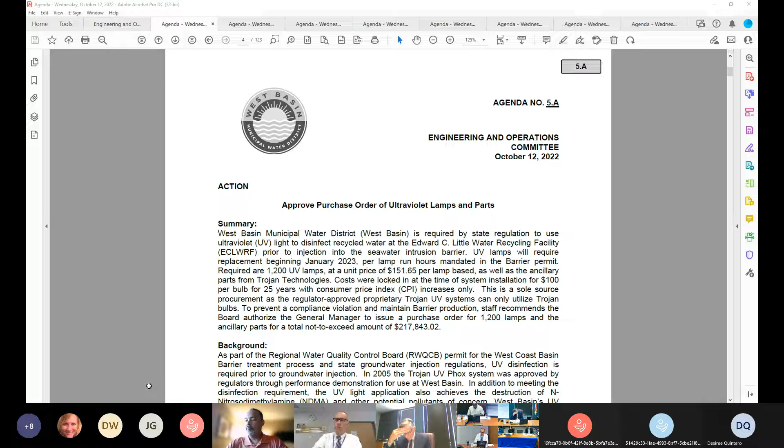Thank you, EJ, and good afternoon, Chairman Alvarez and members of the board. This item has to do with procurement of UV lamps being used at ECL. If you can turn to page 4 of your package, I'll begin with my report. As you're all well aware, West Basin is required by state regulations to use UV ultraviolet lights to disinfect our recycled water for our barrier injection purpose water.

Each of these UV lamps has a certified life of approximately 12,000 hours, which is about 16 and a half months of usage at full capacity. It is required by the West Basin regulatory permit to be replaced within this time frame. These UV lamps were last replaced starting in September of 2020.

Due to the barrier shutdown in 2021 and the extended influent water quality upset, the barrier system was shut down, and staff revised the original replacement date and is forecasting that the lamps will approach that 12,000 hours beginning January 2023.

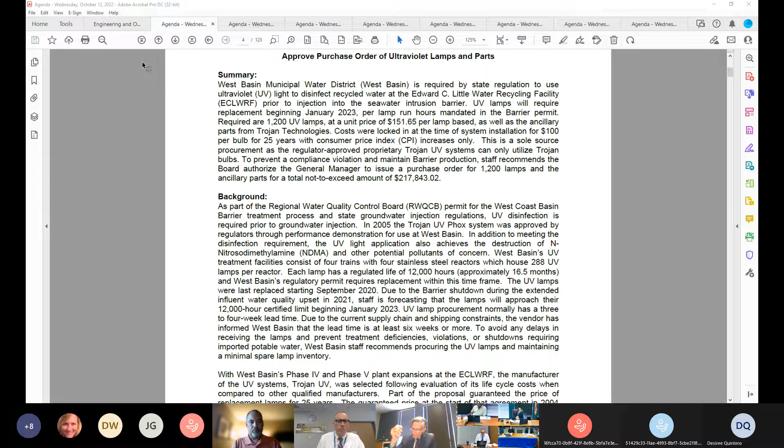UV lamp procurement normally has a 3 to 4 week lead time. Due to the current supply chain and shipping constraints, the vendor has informed West Basin staff that the lead time is now at least 6 weeks out. So to avoid any delays in receiving the lamps and prevent deficiencies and violations, West Basin staff is recommending procuring the UV lamps at this time and maintaining a minimal spare lamp inventory.

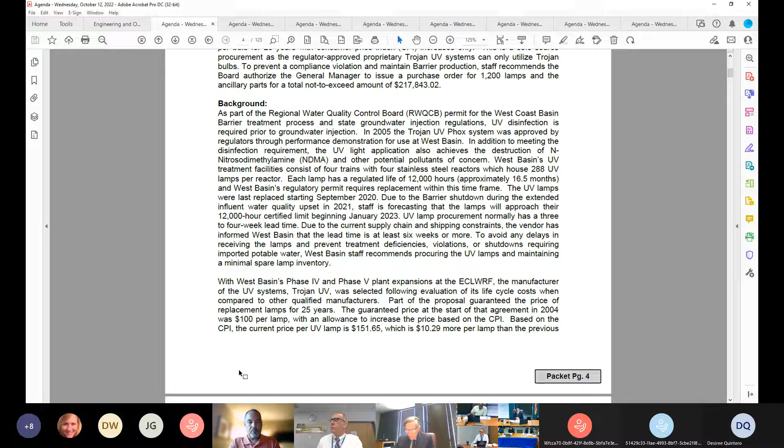As the memo details, the Trojan UV system was selected as the UV system back in 2004, and it is required that we use Trojan lamps for replacement. As part of the original proposal, West Basin was given a guaranteed price of replacement lamps, based with a starting price of $100 per lamp. With the adjustment of CPI, the UV lamps are currently $151.65. In addition to replacement of the 1,200 lamps, West Basin will need to replace some ancillary parts.

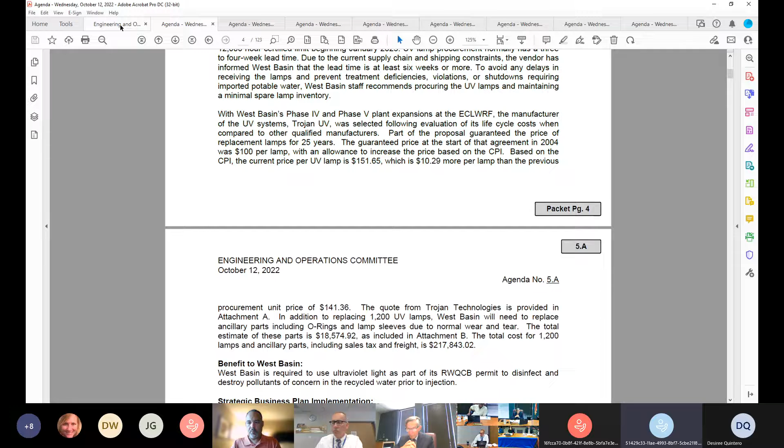This includes O-rings and lamp sleeves due to normal wear and tear and some corrosion that happened due to the extended shutdown time. The total estimate of these parts is $18,574.92, and the 1,200 lamps total $217,843.02 altogether. So with that, I will read the recommendation that the board authorize the general manager to issue the purchase order for 1,200 Trojan UV lamps and ancillary parts from Trojan Technologies for a not-to-exceed total amount of $217,843.02. Okay, thank you. Director Williams, do you have any questions?

It's needed for our barrier production, and we're basically tied to an agreement that we entered into and tied with regulations that we have to purchase these particular lamps. So yes, I concur with the recommendation. Very good. Thank you. I have none.

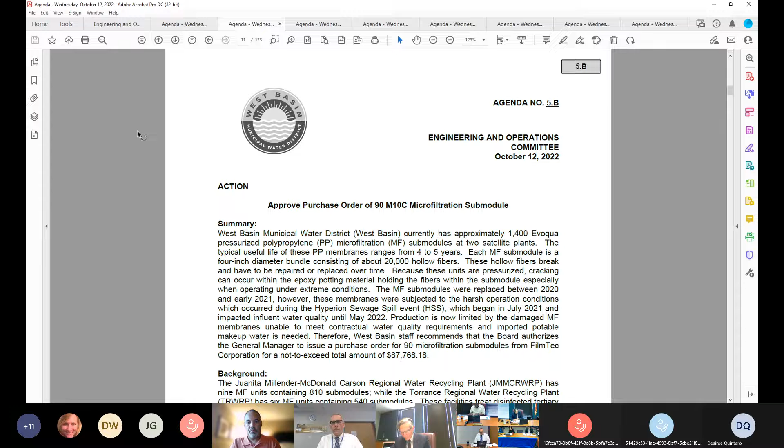Good afternoon again. This item is regarding the purchase of some new pressurized polypropylene MF membranes for our satellites. These are for the older MF systems at our satellites. Between the two satellite plants, JMM and Torrance TRWRP, West Basin utilized about 1,350 of these polypropylene MF membranes, and these are the older systems used to produce the boiler feed water for both Marathon and PBF refinery, respectively.

These older polypropylene MF systems, unlike the newer PVDF MF system at ECL, cannot be subject to the more rigorous cleaning methods and harsher chemicals. So they're prone to fouling easier, and in addition, these hollow fibers are under pressure all the time.

So the cracking within the epoxy potting material holding the fibers together can occur and needs to be replaced. Additionally, these aging MF systems have been operating beyond the original design criteria, as I mentioned previously, and are developing cracks at the manifolds and the center tubes. So these all impact the overall microfiltration water quality.

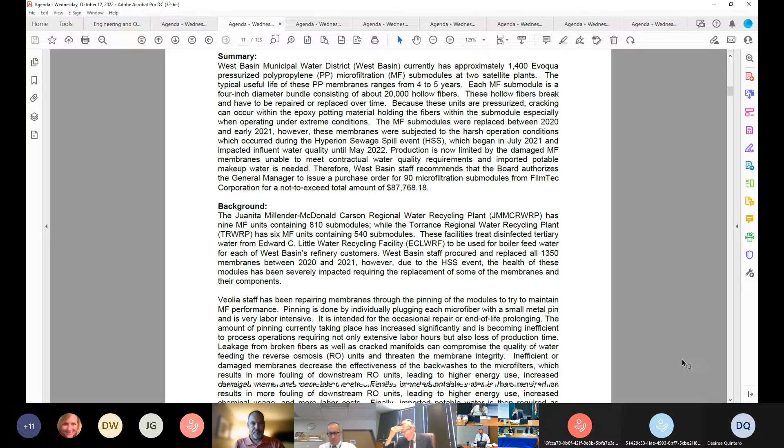Veolia staff have been repairing membranes, or repinning, that's what we call repairing the membranes. These actions are really labor intensive and take a lot of time. Depending on the location of these modules, whether it's outside versus inside modules, it takes a lot more time and sometimes risks making additional damage. So in summary, we've been replacing more than the normal number of modules this past year.

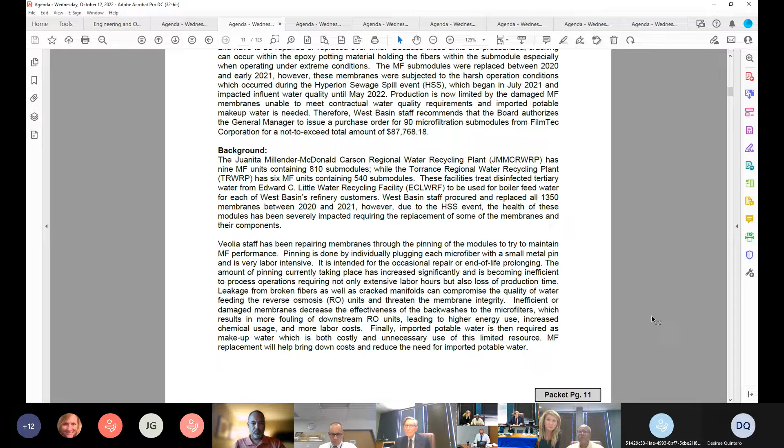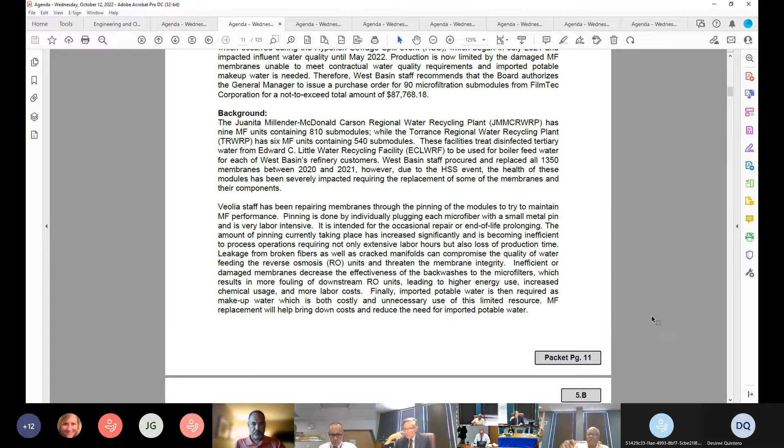Leakage from these broken fibers, as well as these cracked modules, really compromises our water quality that's sent to our customers. It ultimately also affects the RO performance and our membrane life. When our water quality is compromised and results in exceeding our customer requirements, a lot of times we have to supplement with imported potable water, which is used as makeup water to feed the RO system. So at this point, MF replacement will be needed and will help bring down the cost of cleaning and minimize the use of potable water.

Staff is here to request that West Basin purchase about 90 modules to help replace some of the needed membranes that already have many pins done on them.

As mentioned, back in 2020 these older polypropylene Evoqua membranes are of a proprietary nature and can only be replaced with Evoqua/FilmTec membranes. West Basin did have a long-term pricing agreement beginning in 2009, which was renewed in 2017. The negotiated price, with adjusted CPI, currently is $859.73 per module.

For your reference, without the long-term pricing agreement, the current unit price for the M10C module is about $950 per module. There is currently a long lead time for these modules, which are being procured and manufactured in Australia, and we're not able to get these until February 2023. So it's pretty pertinent that we put in the order now so we can get them by February.

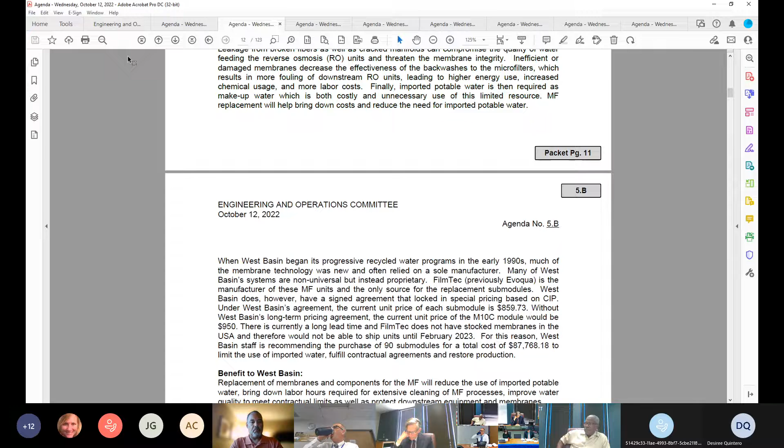In the meantime, staff will have to continue to pin and repair the current modules. Anyway, with that I will read the recommendation: that the board authorizes the general manager to issue a purchase order for 90 microfiltration submodules from FilmTec Corporation for a not to exceed total amount of $87,768.18, including shipping and sales tax.

With that, I can answer any questions. All right, we'll see if we have any questions. Director Williams? No, thank you. Director Williams doesn't have any. How about the other board members? None, no, thank you. Okay, so I have kind of a similar question: what is the typical rate of replacement for these?

Yes, I have some data for you. Back in 2020, when they were almost to the end of their life, our average pinning was probably 1 or 2, and that was at the end of 5 years. Last year, at the height of the Hyperion upset, we were averaging about 5 to 10. And this year, we're seeing like 17 or 20, up to 20. And in terms of replacement, I asked for replacement.

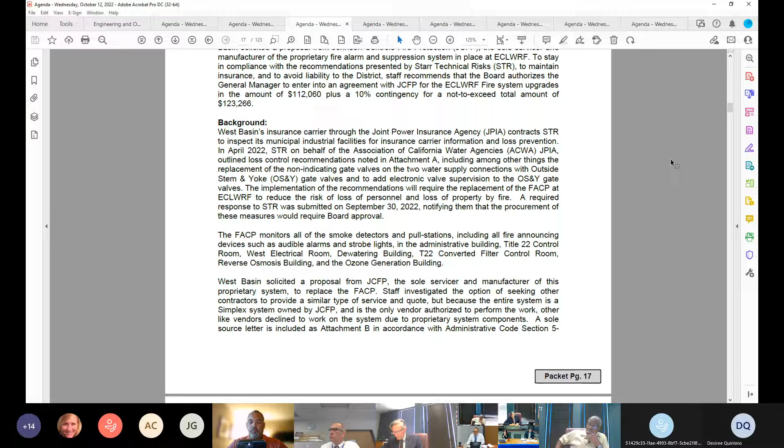West Basin solicited a proposal from Johnson Controls Fire Protection, the sole servicer and manufacturer of this proprietary system, to replace the FACP. Staff investigated the option of seeking other contractors to provide a similar service, but because the entire system is a simplex system owned by JCFP, and they are the only vendor authorized to perform this kind of work, other vendors declined to work on the system due to the proprietary nature of these components.

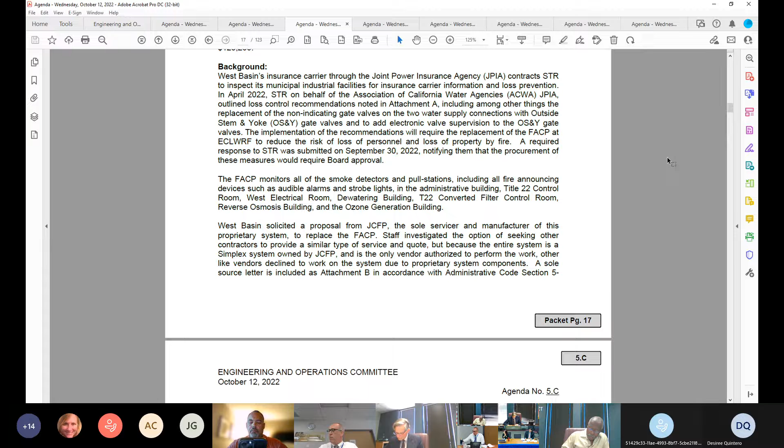A sole source letter is included for your reference in your package starting at page 25 as attachment B. Staff also looked into the alternative of replacing the entire fire suppression and monitoring system extending throughout the facility with a non-proprietary system, but it would take an extended period of time, multiple months, with cost predicted to be more than $1 million.

JCFP submitted two cost proposals, included as attachments C and D on pages 26 and 38 of your packet respectively, to West Basin for the panel replacement and valve supervision implementation, in the total amount of $112,000 and $112,060.

In order to stay in compliance with the recommendations presented by STR and to avoid district liability through threats to life or property, staff recommends that the board authorize the general manager to enter into an agreement with Johnson Controls Fire Protection for the Edward C. Little Water Recycling Facility fire alarm control panel replacement and addition of electronic backflow valve supervision, in the amount of $112,060 plus a 10% contingency, for a not-to-exceed total amount of $123,266. I'd be happy to answer any questions.

Thank you. Director Williams - no, thank you. Any of the other directors or board members have any questions? No, thank you. No, thank you. I don't have any questions. So with your concurrence, Director Williams, we'll move this item forward also. Absolutely. Okay.

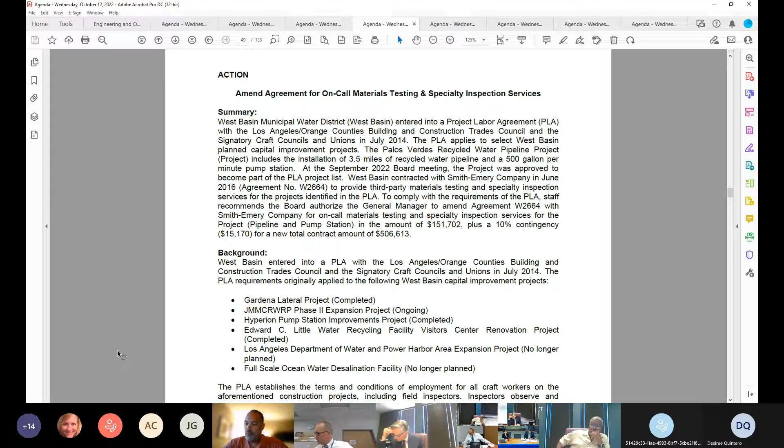To amend agreement with our existing on-call material testing and specialty inspection services company. As you might recall, at the September board meeting, the Palos Verdes Recycled Water Pipeline Project, including pipeline and pump station, was approved to follow the project labor agreement requirements that West Basin currently has with the Los Angeles Orange County's Buildings and Construction Trades Council and the signatory craft councils and unions. This PLA was signed in July 2014.

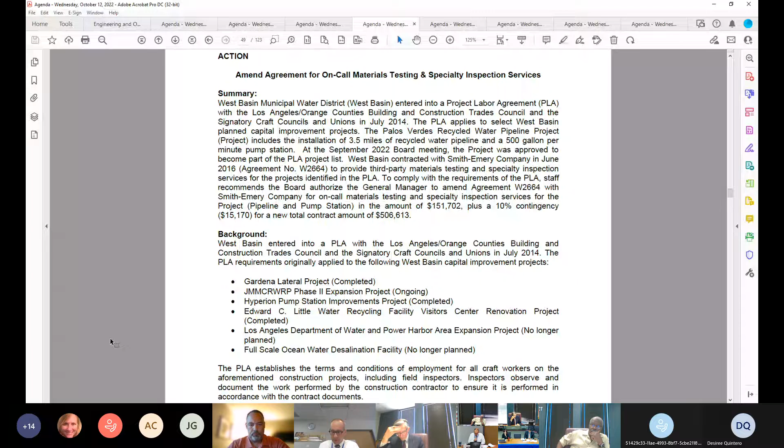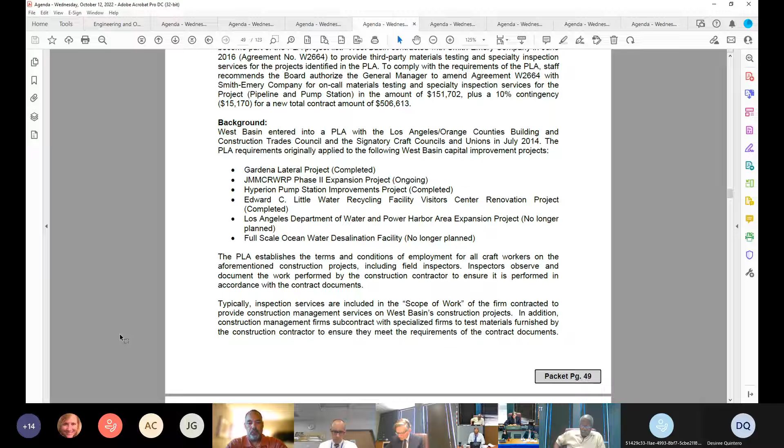And in order to comply with the requirements of the PLA, in 2016 West Basin entered into an agreement with Smith Emery to be able to meet the requirements that the PLA requires for specific characteristics regarding the crafts. So typically construction management includes material testing and specialty inspections, but because construction management tends to be professional service, they don't fall into the PLA. So for the same reason, with having a third-party contract with a specialty construction material testing firm, West Basin is able to meet those requirements on the PLA.

The PLA, it's important to notice, limits the number of inspectors that can be employed, and also requires fringe benefits to be paid directly to the union throughout the duration of the work. So that's something that construction management teams typically cannot do or meet.

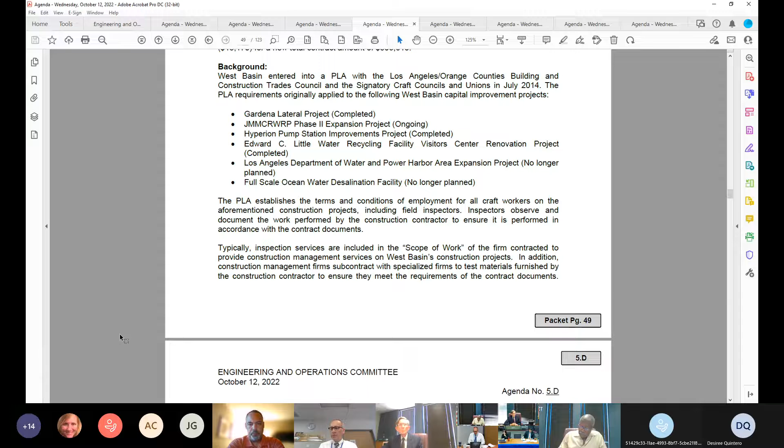So for the same reason, with the Palos Verdes Recycled Water Pipeline Project becoming a new project to follow PLA, staff is recommending to amend the contract that we currently have with Smith Emery to perform these services. Smith Emery has already completed 3 projects, one being a pipeline and the other being more like a facility structure type of work. And currently they're working on the Juanita Millender-McDonald Phase 2 expansion project.

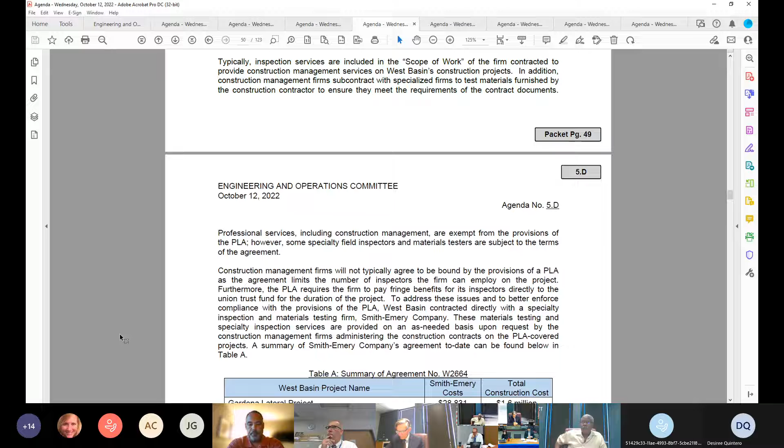West Basin requested a quote to do this particular work on the Palos Verdes project. Again, this is pipeline and pump station. And their quote became $151,702. Sorry, can you see well?

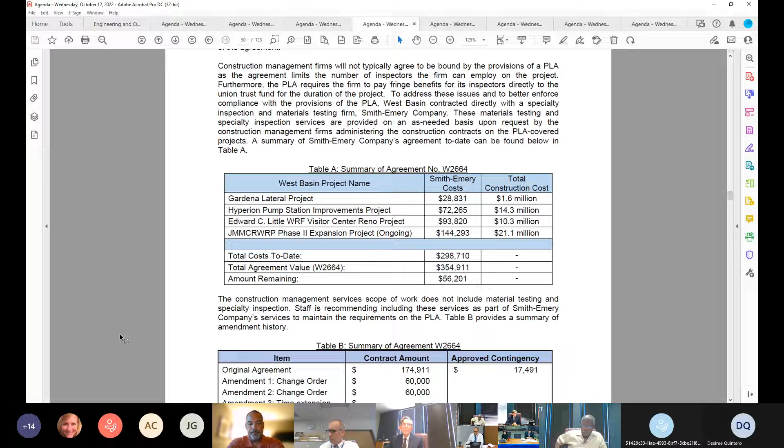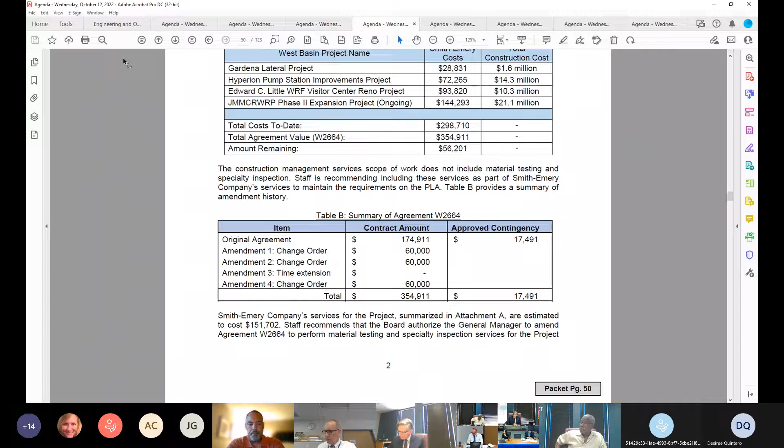So with this, I will read the recommendation. Please note that as part of the attachment, the quote has been included on this board item. The recommendation reads that the board authorizes the general manager to amend agreement W2664 with the Smith Emery Company to provide on-call material testing and specialty inspection services for the Palos Verdes Recycled Water Pipeline Project, which is pipeline and pump station, in the amount of $151,702, plus also a 10% contingency, which consists of $15,170, for a new total contract amount of $506,613. With this, I'll be happy to answer any questions.

Okay, thank you very much. Director Williams, do you have any questions? None here, I don't see anything out of the ordinary.

Any of the board members have any questions? No, thank you. And Director Deere, if I could point out that we did mute you on our end. So if you'd like to unmute yourself, you'll have to hit star 6. Okay, sounds like you're off mute. So if you have anything to add, please go ahead. Apparently not.

Okay, so I have just a question or two. We're doing two actions here, basically amending the PLA to include Smith Emery. No, it's only one action item, which is a change order approval for Smith Emery for an additional $151,702 plus a 10%. It's just, that's the only action.

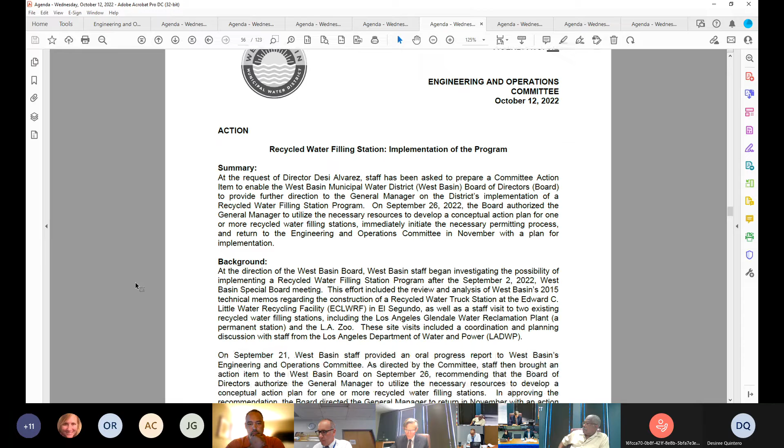Happy to do that. This item is on your agenda as item 5E, the recycled water filling station. It begins on packet page 56, and I'll be handling this presentation. We do have an assortment of staff and our leadership, our general manager, available for any questions you might have.

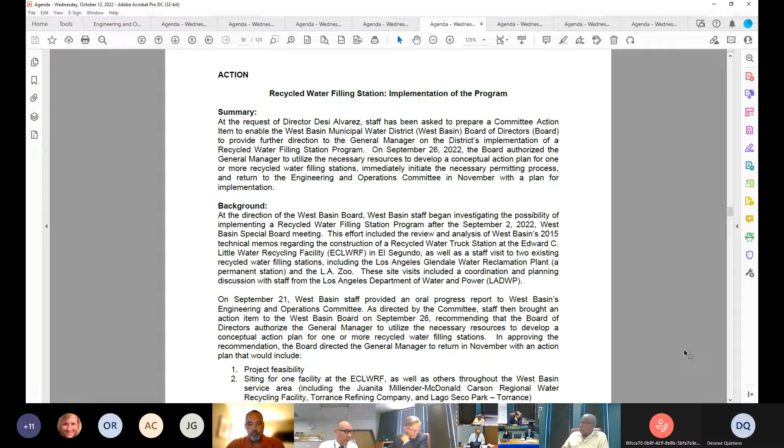In September, West Basin staff brought back an oral progress report at West Basin's Engineering Operations Committee on findings from pursuing a recycled water filling station. At the request of the committee, we brought that back on September 26th with a board memorandum action item, seeking feedback and also contemplating a specific action plan to bring back in November.

Staff has been meeting, we created an internal working group, and have held two meetings accordingly, plus a third one today, working towards the future. You can see what was summarized in that board memo on September 26th.

At the direction of our chairman, Director Alvarez, he asked for staff to bring this back as an additional action item for this committee, for additional input from the committee and board to the general manager regarding implementation of the recycled water filling station. With that, I'll throw it over to our chairman for additional feedback.

Okay, you had some exhibits and so on in the material you sent out. Do you want to go over those, or is that something for later?

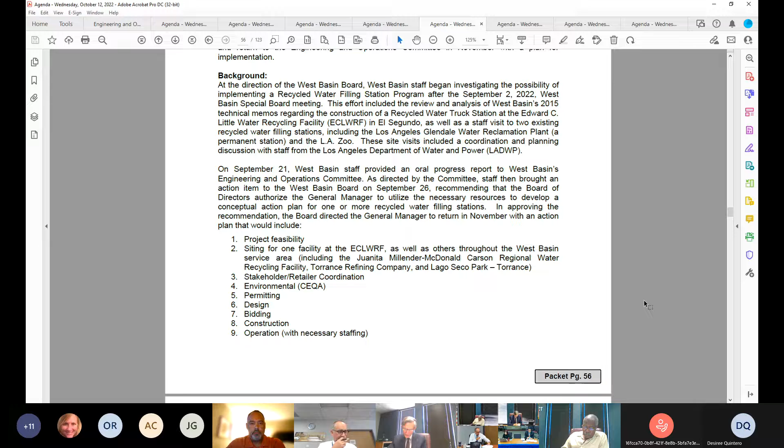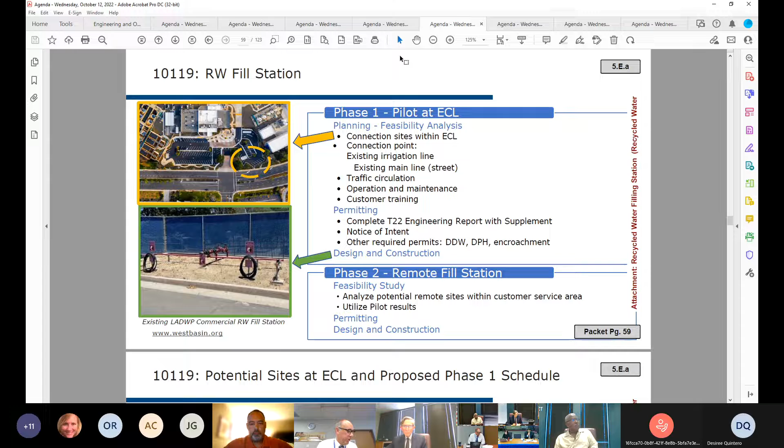I'm happy to do this. What this contains, our engineering team put together the first two slides, that's why they look so much better than the others. I wanted to highlight that what we've been doing is working on a phased approach to incorporate a recycled water filling station at the Edward C. Little Water Recycling Facility, which is perhaps the easiest aspect of doing this. But at the direction of the committee and board, we're contemplating additional potential remote sites within the West Basin service area and within the delivery system of the water recycling system for additional filling sites. You can see that phased approach on packet page 59.

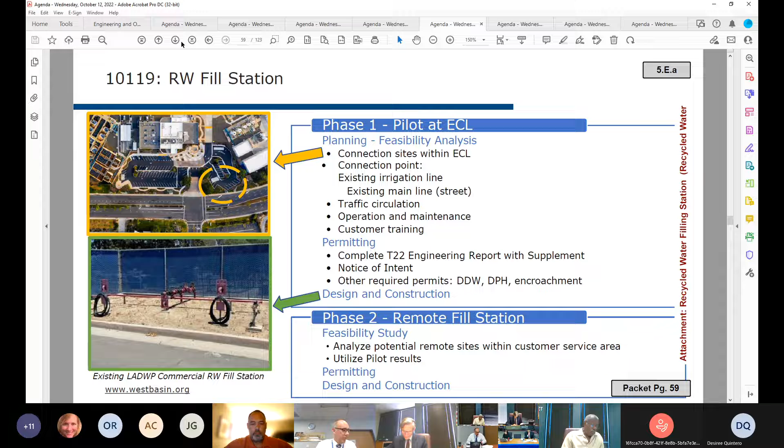If you turn the page, you can see on packet page 60 some of the contemplated aspects of having a recycled water filling station at the Edward C. Little Water Recycling Facility.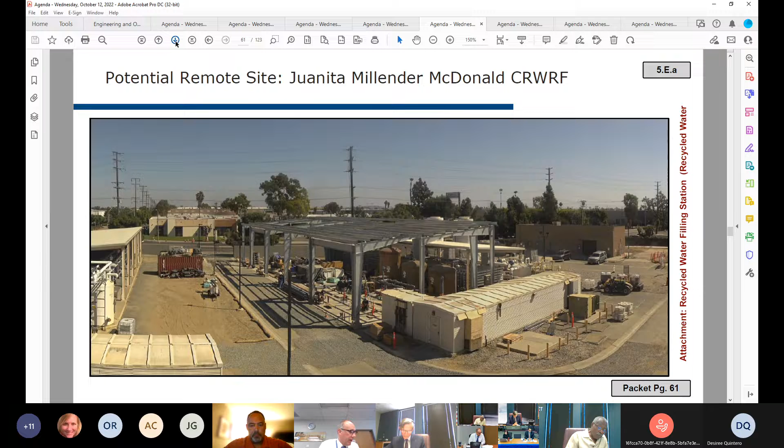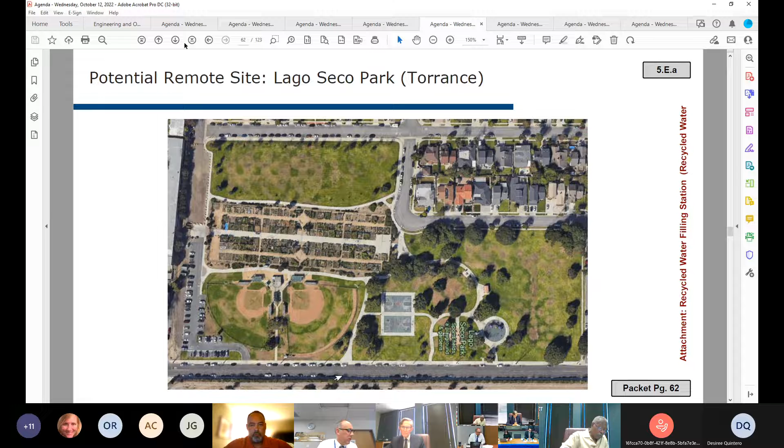We would like to get this done much sooner, but this would be a conservative approach. If you turn to packet page 61, this committee and the board did identify potential local sites for a recycled water filling station. It was mentioned that the Juanita Millender McDonald, Carson Regional Water Recycling Facility could house one. On packet page 62, this is Lago Seco Park in the city of Torrance, identified as a potential option. And on packet page 63, you'll see the Torrance Refining Company, requested by staff to look at as a potential location for a recycled water filling station.

West Basin staff has begun discussing the prospect of partnering. We identified that the Los Angeles Department of Water and Power would be a great partner, but we also have initiated conversations with the city of Torrance about potential sites and locations. While they appreciated discussion of these sites, they came together with some additional sites as well.

So we would explore all of the options. I did ask that this item be put on the agenda today for discussion purposes and maybe some further direction. When this item was brought up as something that could be implemented fairly readily, at least on a simple basis at one site, and maybe then expanded at other sites, we did identify other sites.

But the primary site was the Ed C. Little facility, where there are already pipelines that carry recycled water. It can be easily modified and tapped to put in a standpipe and a hose, so the public could come and avail themselves of that.

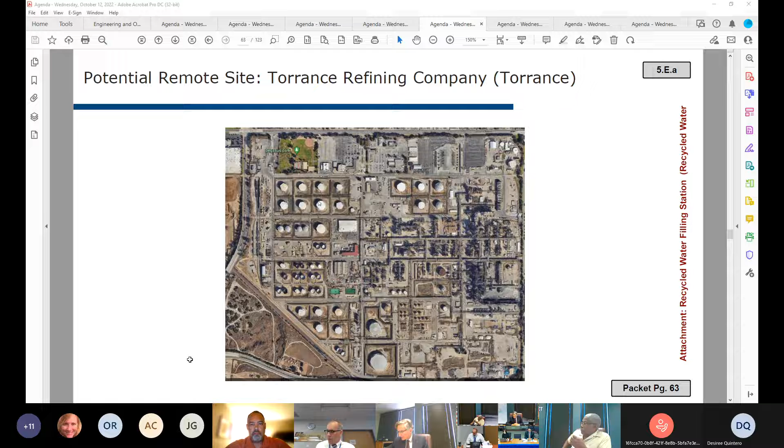We are in the process right now of issuing a task order to our on-call consultants who would assist us. It's important to note that I know our general manager, myself, and our staff have heard the comments from the committee and the full board, and we understand that this is a high priority item, that we understand the importance of this item, and we really recognize the community value of it. But this is not a budgeted or planned program or project. We are pulling our staff together, and while it sounds quite easy, it's amazing to see how many different departments this involves as far as how we're going to roll it out. So I'm very pleased with the progress that's being made, but we really need an on-call consultant to assist us.

And with that, we have begun the process of reviewing our current Title 22 permit, but we do recognize that we would need to focus in on that site-specific permit, and hopefully we could move forward on that. That would allow us to move forward in a quicker manner than you see here on the page. But we do have our engineer, Manager of Operations, Uzi Daniel, here. She could provide more of the specifics. But again, I think this is a process of focusing in on that site-specific Edward C. Little facility, as you just said, and hopefully we move through the process quicker than we're anticipating.

So I don't know, Director Williams, if you have any comments on this, or how about the other board members?

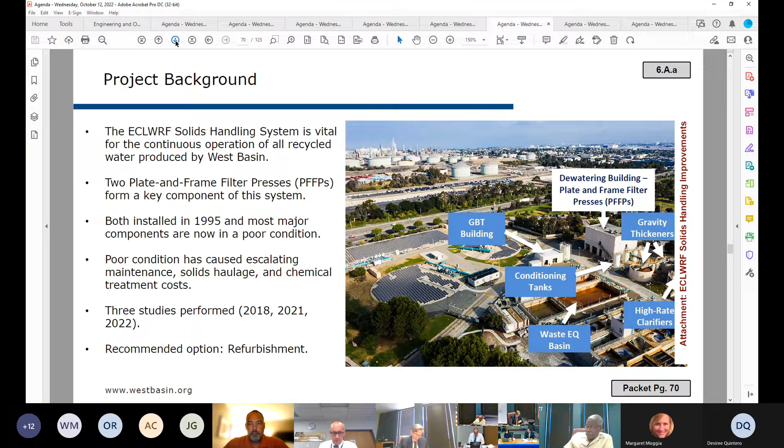Before we evaluate the options available to West Basin, it's important to assess the need for such a project. We touch on some of the key points of this work, going into a little more detail. The most significant point is the increased risk of a recycled water shutdown.

As previously mentioned, these PFFPs are a critical component of a critical system. If the PFFPs fail, we will be unable to produce recycled water. A shutdown of this size has been estimated to cost the district at least $923,000 per month in lost sales and increased purchase of potable water.

As many of the PFFP components are specialist items, some coming from Europe, a potential shutdown could last longer than 1 month.

Even if the PFFPs don't completely fail and cause a recycled water shutdown, their poor condition is currently causing increased costs each month. To put this into numbers, we have to remove approximately 8,000 tons of solids from the treatment trains each year. If the presses are in good condition, they can create cakes of approximately 50% density, meaning we would need to haul away approximately 16,000 tons of cake solids.

In their current state, the presses are producing cakes of 30% density, meaning that we need to haul away approximately 27,000 tons in order to remove the same 8,000 tons of solids from the system. That equates to approximately 70% more tonnage to be hauled. As you can imagine, this has a huge effect on both our haulage and chemical treatment costs.

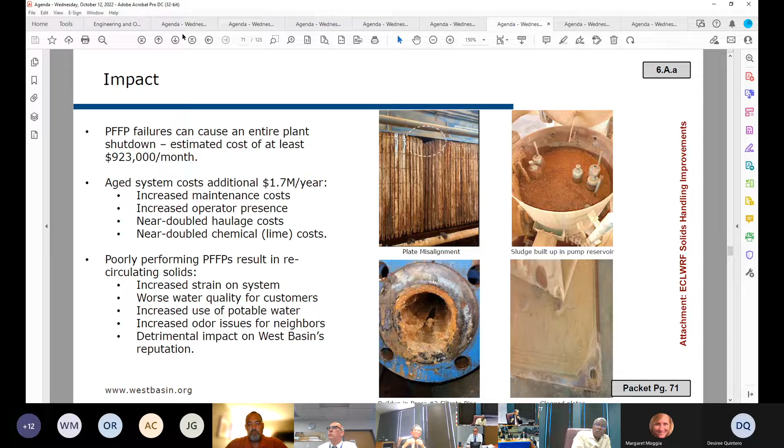In 2021, West Basin staff commissioned a study to evaluate the potential to discharge into either the Los Angeles County Sanitation District sewer main, LACSD, or the City of Los Angeles Sanitation and Environment sewer main, LASAN, eliminating the need for a solids handling system altogether.

However, due to the composition and quantity of West Basin's solids discharge, the annual surcharge fees, which are based off those agency ordinances, were substantial. In addition, both agencies expressed significant concerns about whether such a connection would even be viable, considering the age and capacity of their current sewage treatment systems and their sewer mains.

However, if the sewer discharge option were to become viable in the future, the LACSD connection would be the most economically prudent of the 2 alternatives.

Over the last year, West Basin staff have commissioned a new study, one that takes the major alternatives evaluated in the previous studies and applies current costs to them. The main drivers behind this new study were the rapidly escalating haulage and chemical costs across the industry.

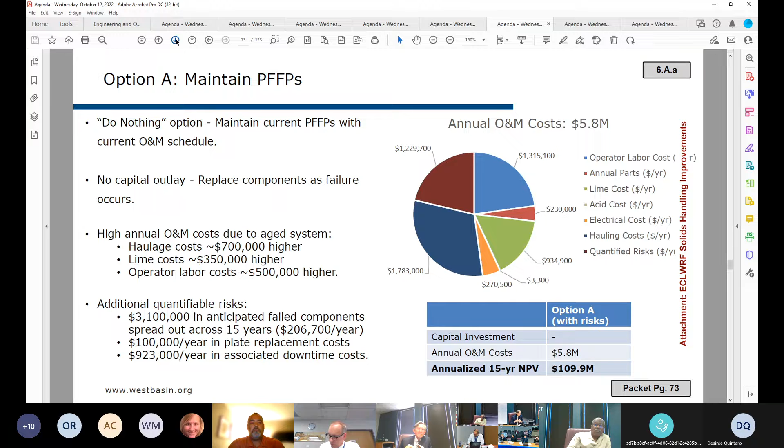Option B is the recommended option of both West Basin staff and the 2022 solids disposal study. It entails the refurbishment of our current presses and associated components. This refurbishment would comprise the replacement of many components that are beyond repair and the refurbishment of several components that can be salvaged. Such a refurbishment would restore the PFFPs to a like-new condition and extend the system's useful life by approximately 10 to 15 years.

However, this option would result in a significant reduction in annual O&M costs. The 2 main drivers behind this are efficiency and reliability. A refurbishment of the presses would increase their efficiency back to the level able to produce cakes at 50% density, massively reducing both the annual haulage and chemical costs. In addition, a more reliable system requires less maintenance, less operator presence, fewer costly urgent component replacements, and most importantly, a near zero risk of downtime.

All of the risks associated with the previous option, the maintenance, are mitigated by this refurbishment. And in addition, all of the unquantifiable costs such as reliance on supplementary potable water, odor issues, and solids circulating in the system would also be significantly reduced under this option.

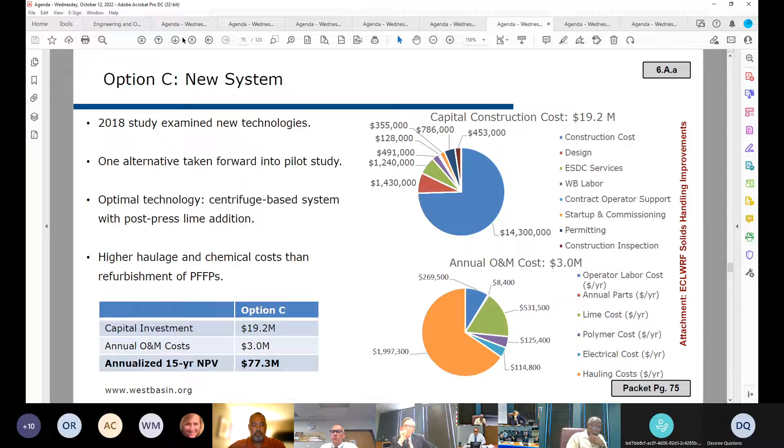In addition, the annual O&M costs are slightly higher as well. This is due to the centrifuge-based design naturally resulting in lower cake densities than a refurbished PFFP. In 2018, this was lower, hence the recommendation to replace PFFPs with this design. However, the escalating haulage and chemical costs in recent years caused this option's annual O&M costs to rise far faster than the refurbishment, leading to it no longer being the most economically viable option, with an annualized 15-year NPV of $77.3 million.

The final option we'll look at today is the most viable of the two sewer discharge options. In 2021, West Basin staff commissioned a study into the potential of discharging solid sludge directly to local sewer mains, thus bypassing the need for a solids handling system. The study looked at two options: discharging to the LACSD sewer main, located just outside ECL, or discharging to the LASAN sewer main at one of two potential locations further north in El Segundo.

Both of these options fall under agency ordinances for discharge. These ordinances dictate both a fixed one-time connection fee of approximately $13 million and an annual surcharge fee based on quantity and composition of the discharge. All of these fees are prescribed by agency ordinances and cannot be reduced.

West Basin staff have had several meetings with both agencies and discussed the fees themselves as well as potential payment plans or trial periods available. However, none of these would benefit West Basin nor reduce the overall costs. In addition, it should be noted that both agencies and the City of El Segundo expressed concern about this discharge plan due to the current condition and capacity of their systems.

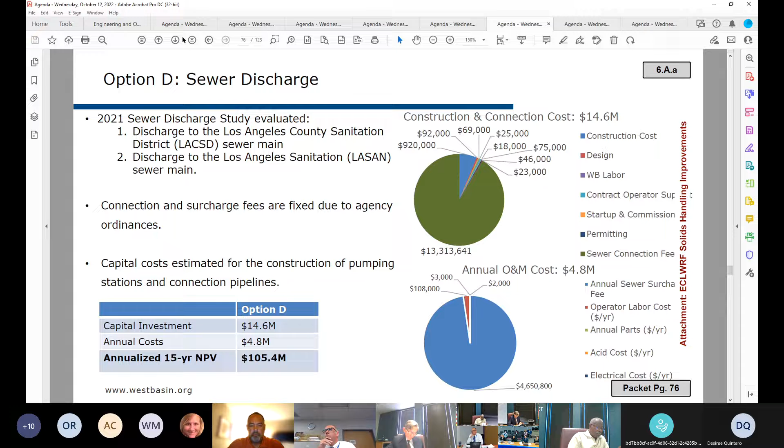This means that a refurbished system would begin saving the district money each year from this point onwards. In addition, approximately $2.6 million of refinery funding has already been agreed, which would reduce West Basin's capital expenditure and further reduce the break-even point to approximately 4.2 years.

But due to the potential for switching to advanced treated water, it is important that any decision made now has this prospect in mind. The refurbishment of the presses is forecast to pay for itself before the earliest date the switch could occur. Therefore, even if the switch to MWD water occurs in exactly 5 years, West Basin would save close to $1 million by refurbishing the presses now. And more importantly, if this switch were to be delayed, West Basin would be realizing savings of approximately $3 million for every year of delay.

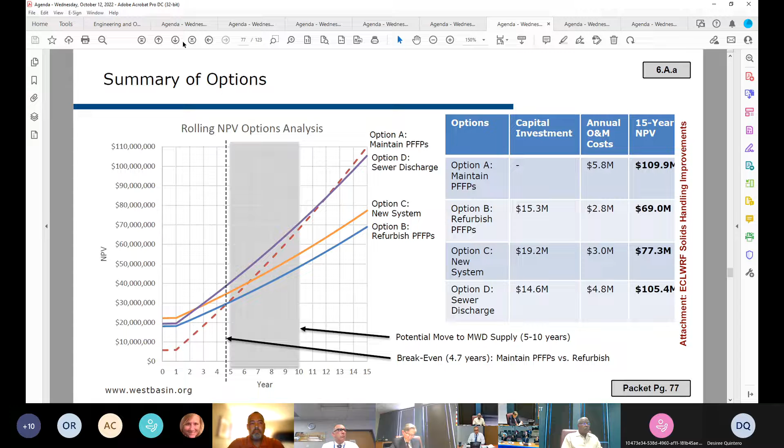So what's the fiscal impact of the proposed refurbishment? In the 2022-2023 approved budget, the solids handling project sought $1,519,543 in funding for this financial year. The total project estimated cost at the time is $9,150,000. This total project estimate has since been revised to $15,300,000 to match the cost estimate given in the 2022 solids disposal study.

However, the 2022-23 fiscal year budget will likely remain the same. This is mostly due to the fact that this financial year will be spent undertaking limited design and installation of some minor components. While the current schedule dictates pre-procurement of major components beginning towards the end of this financial year, most of the payments for these components will be made once the items are delivered in the following financial year, so 23-24. Therefore, the bulk of the project budget is expected to be spent in the financial years 23-24 and 24-25, when major components are delivered and require installation.

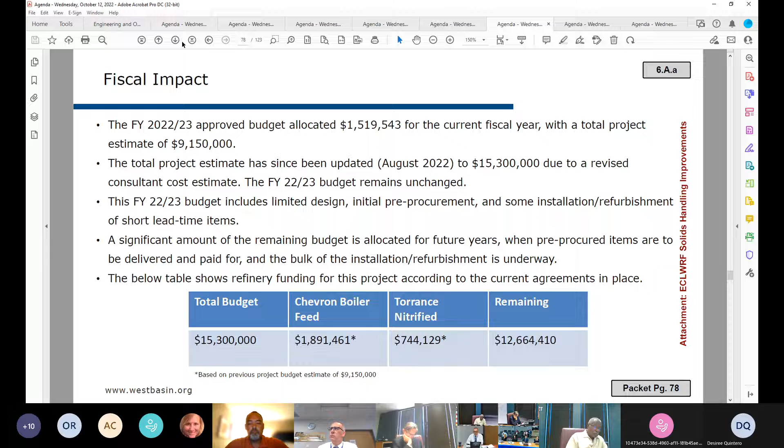The current refinery agreements have approximately $2.6 million in confirmed refinery funding for this project, reducing West Basin's anticipated capital expenditure to approximately $12.7 million. As previously noted, this reduction in anticipated capital expenditure further reduces the break-even point with the do-nothing option to 4.2 years. Next slide, please.

After today, the next task undertaken by staff will be the filter cloth specification and the limited design request for proposals. These are internal tasks, and the project will be brought back to the board before any funds are awarded.

While only a temporary boost due to the underlying state of the filter presses, replacing these cloths early on in the project can significantly reduce O&M costs in the first year. For this stage, we aim to bring an award for purchase of the filter cloths to the board later this month, with an award for installing the cloths in the December board meeting. The cloths have a lead time of around 13 weeks, so it's important to procure them as quickly as possible to realise the efficiency benefit. Both of these awards are estimated to be around $75,000 each.

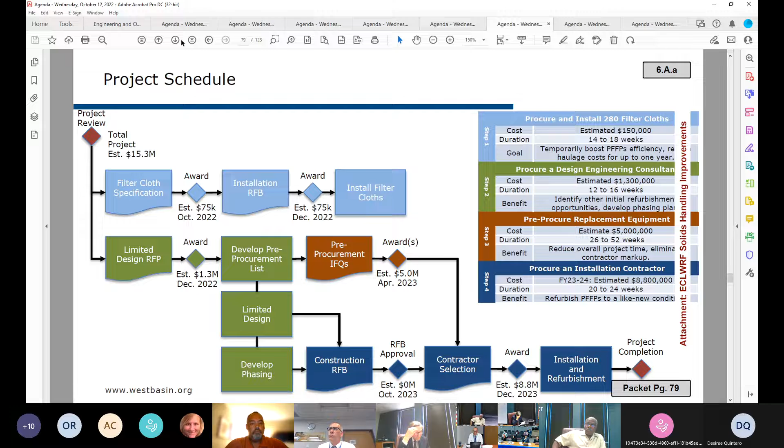That concludes both the presentation and the information item. As mentioned, we'll next be bringing this project before the board in the regular board meeting later this month, seeking award of procurement contract for the filter cloths. Are there any questions?

Let me clarify that we would be bringing any future action to the committee first before we bring it to the full board. We would not go straight to the board with those particular procurement items that John mentioned.

I think perhaps we were planning to present this in September, but I have provided supplemental information to the committee here, binders of the analysis. Rather than bring this to the September meeting, we brought it here today to give the committee time to look at those binders, which included these presentations that were intended to be given back in September.

And so thank you, John, for that presentation. And sorry to interrupt, Chair Alvarez.

Director Williams, do you have any questions, comments? I'm just happy you're not asking us to spend any money today.

But that's coming up. We're just being set up for spending great money. Presentation... I mean, this is some heavy duty stuff and excellent presenter. I must tell you, great job. But since it's informational only, I will take in this information and I'll check with you later. Thank you.

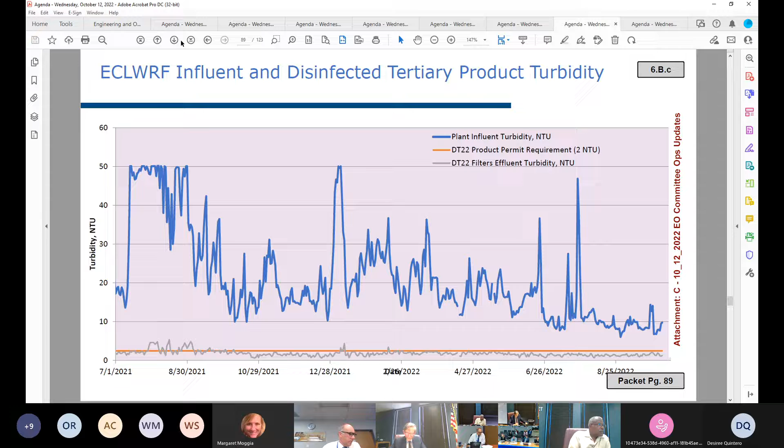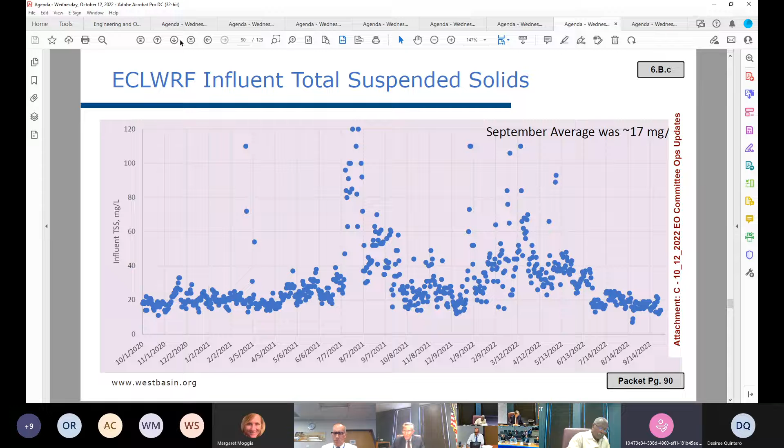Shortly and home for dinner. Really short. All right, we can move to page 89. We'll begin with water quality, I will be short. As you can see, the graph focuses to the right. The water quality has been improving, and we are averaging down to around 9.2 this past month. So that's excellent. Moving to the next page, our suspended solids floating into the plant now is averaging, right before the Hyperion upset, around 17 parts per million. So that is good.

With that, we can move to page 91. For all these photos, these are all routine maintenance work, but I do want to highlight the second photo from the right. That was relocation of a temporary sodium hypochlorite tank, a temporary solution for a leaky bulk tank that happened at JMM. So that original bulk tank has already been decommissioned and needs to be replaced. Right now, we do have a temporary tank in place of the original tank, which is not properly designed. So engineering will be bringing this item to the board's attention for the design and replacement of this tank in the coming months. So I just wanted to highlight that particular effort. With that, I'll pass it on to the next.

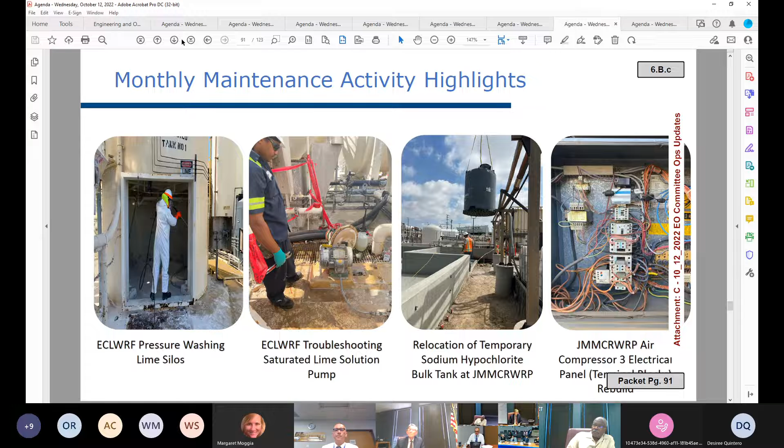Jamie, next slide please. Next slide. Same comments, I only have a couple slides.

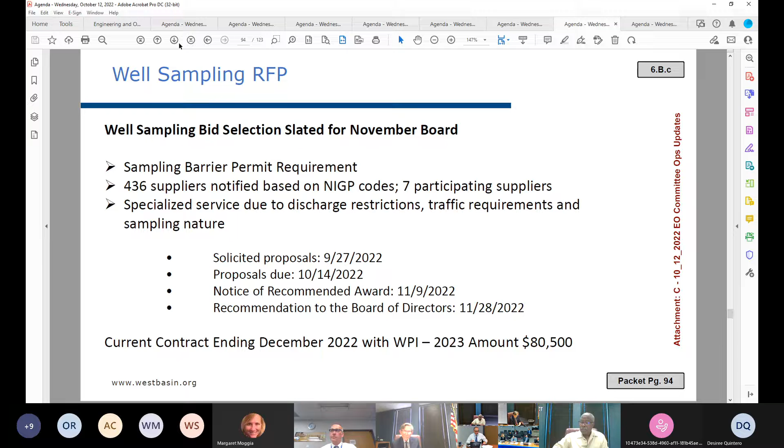Good afternoon, directors. Try to make this quick as well. This is the monthly potable water customer service update. I just wanted to highlight for...

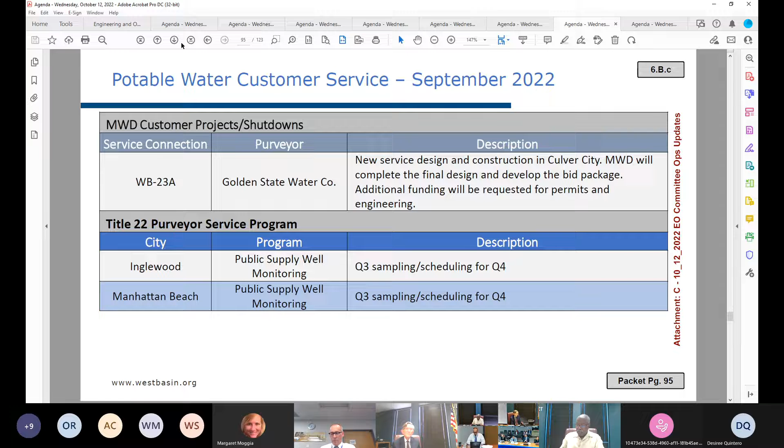WB23A, this is a new service design that's being implemented by Metropolitan Water District for Golden State Water Company. They're requesting some additional funding. Metropolitan is to complete the design, and so we anticipate bringing this to the board next month for consideration. Next slide. On that one, when that comes back to the board for consideration, the funding is something that should be paid for by Golden State? Yes.

This is our monthly distribution update. This is the work that's implemented by our distribution operator, Inframark. Just wanted to highlight that we had one service line leak. Last month, it was a minor leak. It was repaired immediately. It's located in Carson on Wilmington Avenue, just north of Carson Street.

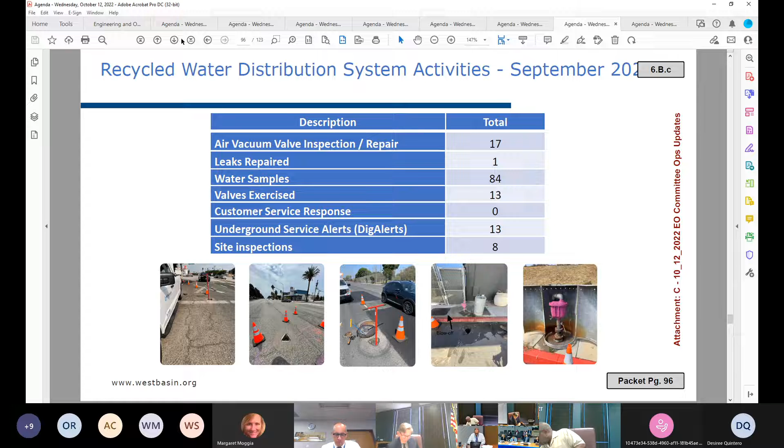Inframark exercised 13 valves, and they also completed 13 dig alerts. If that number is incorrect, it will be revised. Next slide.

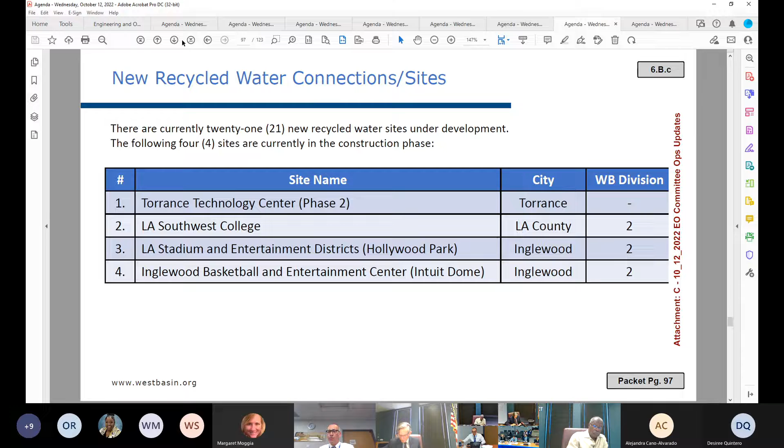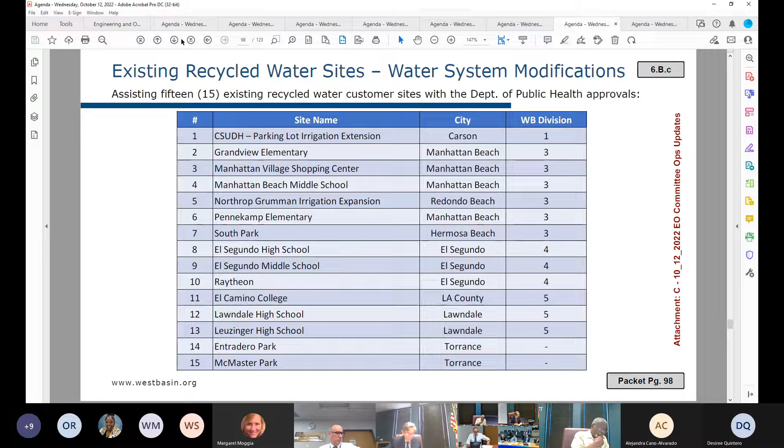Moving on to the next slide. This is the table of the existing recycled water sites that are undergoing modifications. I just wanted to highlight the Northrop Grumman site that currently uses recycled water for their cooling towers, and they've already started construction to expand the recycled water use for their irrigation and one additional cooling tower. Next slide.

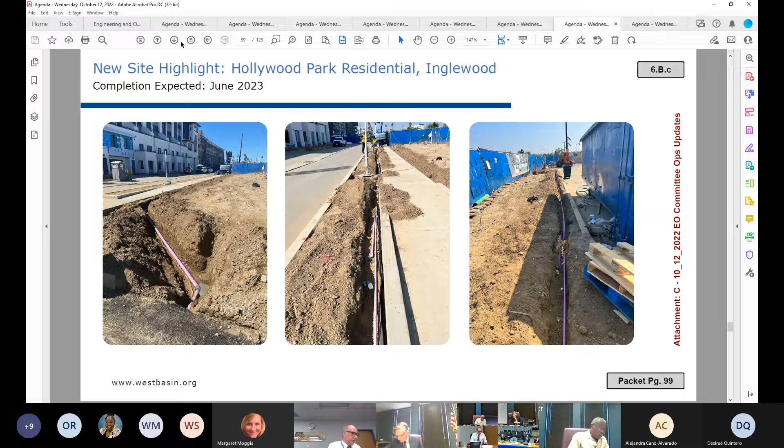This is just to highlight some of the inspection work that we've been implementing with the Department of Public Health. This is within the SoFi Stadium development. This is the Hollywood Park residential, which will utilize recycled water for irrigation. These are just some photographs from the recent inspections implemented with the Department of Public Health. Next slide.

Similarly, we've been continuing to work with Leuzinger High School in Lawndale. They're modifying their existing recycled water irrigation system, as well as replacing their athletic fields with artificial turf. Again, we've been working with the contractor and the Department of Public Health to conduct these site inspections. We anticipate they'll complete this work and connect in November.

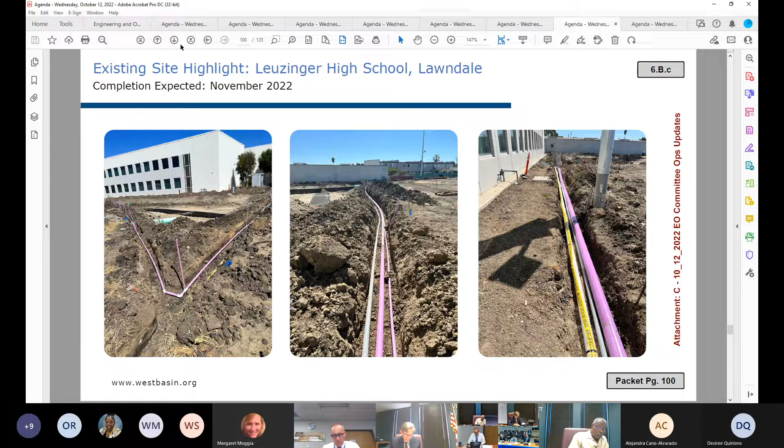Moving on to the next slide. This is work that the Manhattan Village Shopping Center has been undergoing. They are a site that's already using recycled water, but they're currently expanding their recycled water use to a parking lot on the north side of that property. We anticipate that they'll complete that in December of this year. These are some photographs from a recent inspection with the Department of Public Health.

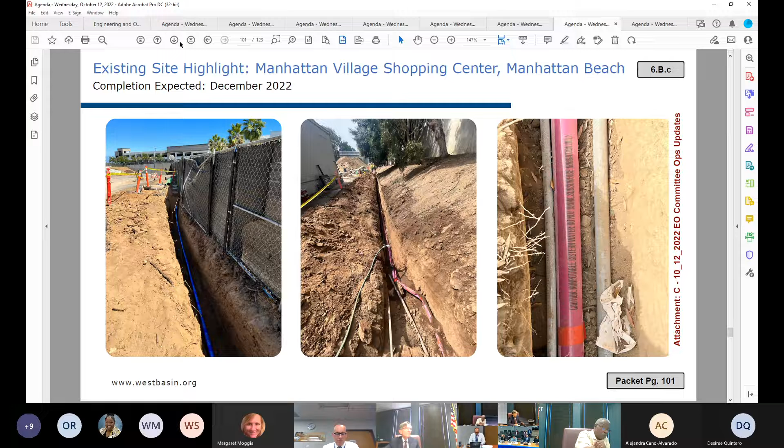That completes our presentation. We'd be happy to answer any questions. Any question, Director Williams? No, thank you. Any question from the board members? All right, no other questions. Thank you very much, that was very succinct.

We appreciate that. So the next item up and our final item is the monthly engineering update. That is correct. And for this presentation, which begins on packet page 103, we again have a team of our West Basin staff. We have Wendell Johnson, our manager of engineering, Camille Castillo, engineer 1, Veronica Govea, engineering supervisor, and Kevin Cullen, our engineer 2.

Good afternoon, Chairman and members of the board. We're here this afternoon to give you a quick update on our CIP status. If you could turn to page 106 in your packet. We presented this slide for the first time about 2 months ago, but we never had a chance to really explain it. This slide lists all the active projects that are in the CIP. In addition, we added that green column, which tells you what the budget is for this fiscal year, and it also shows you what is spent for this fiscal year.

In addition to that, all labor is captured here. In this particular case, if you look at the bottom of the slide, it's through 8/31, 2022. So we're able to show both project costs to that date, as well as the labor costs involved.

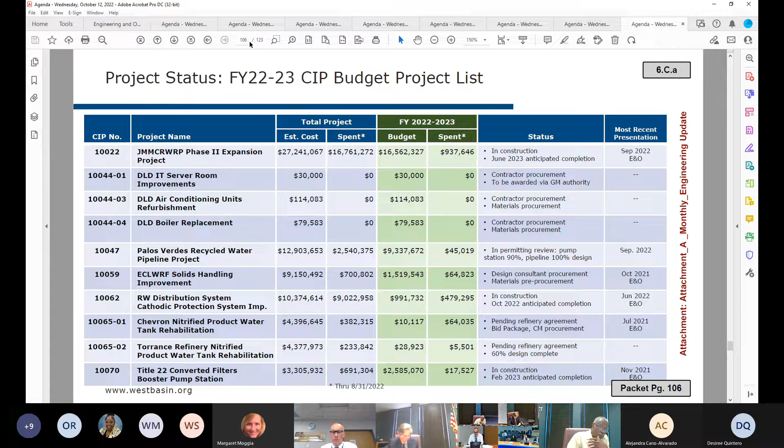Thank you, Wendell. This particular project is basically a component of a much greater project we had in mind as part of our upcoming budget planning. In August of 2022, the operators noticed there was a leak at the bottom of the tank, which you can see in the top right corner. At the bottom, it's hard to see, but essentially that's the leak right there.

Our operators were very quick at stopping it and called a company to clean up, and were able to bring in a supplemental tank in the meantime while we get another tank in place. The original tank is about 23 years old, from 1999, and is essentially the bleach tank. Currently, this tank supports the nitrified system as well as the boiler feed.

The tank temporarily being used is a little smaller, 6,900 gallons. Our next steps to get this project going will be to get a small scope of work for one of our on-call services to address the anchoring needed as part of the seismic retrofitting for the new tank, and start the procurement process. We're decoupling this project from the overall bigger program, as this tank requires more immediate attention to be replaced.

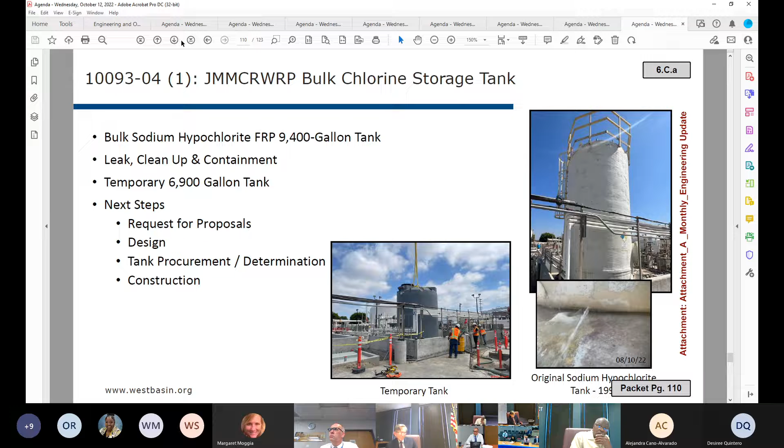Because of the holidays, it might be a little difficult to get that out in mid-December. So construction award is expected for March 2023, and construction notice to proceed in April 2023. As part of other components we're looking at, we want to minimize the time impact waiting for the fabrication of this tank. On the design side, we're looking at how long the tank will take to be fabricated.

If it makes more sense for the district to purchase the tank to minimize the time it sits at the site, we'll get the procurement done first and move in that direction. Otherwise, it might be the contractor who gets the tank, depending on the timing. With that, I'll be happy to answer any questions.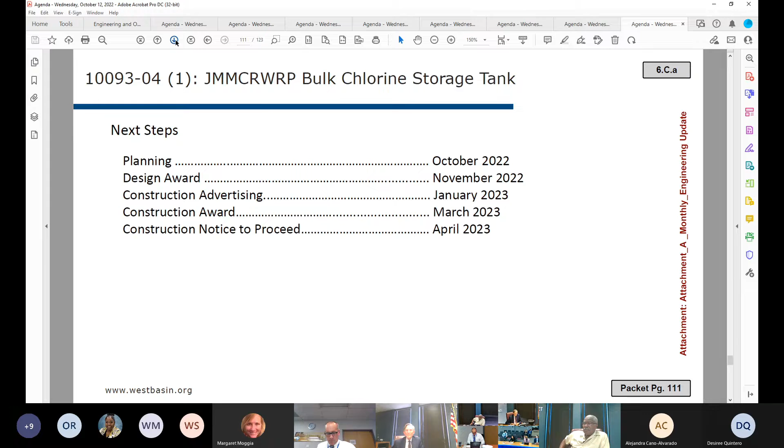Thank you, Wendell. Good evening, members of the committee. As EJ mentioned, he went into depth on this, so I will cover the details of how we want to break this into two phases and the feasibility analysis that we plan to partake in.

As part of phase one, we want to look at the connection sites. We will onboard a consultant who will analyze the potential sites within ECL that we could utilize, and as part of that analysis, the connection points as well, so we can tap into existing irrigation lines. Currently there are about 1 inch to 2 inch lines located throughout the facility.

We can also potentially tap into the existing main line located along Hughes, which is about 8 inches. We would also ask the consultant to consider the traffic circulation and potential impacts that traffic might occur utilizing the existing visitor center parking lot.

Depending on the hours that customers are able to go, it might have some traffic impacts. We would also consider operation and maintenance, mostly the staffing that would be needed if it becomes a permanent fill station. Because LADWP shared a lot of materials with us, we want to consider the customer training and resources needed to implement this project.

After the consultant is able to prepare this feasibility analysis, they will go into design and construction. Separately, we would onboard another consultant to help with the permitting. They will prepare the site-specific supplemental engineering reports, and in case the Title 22 engineering report needs to be completed, they will help complete that as well.

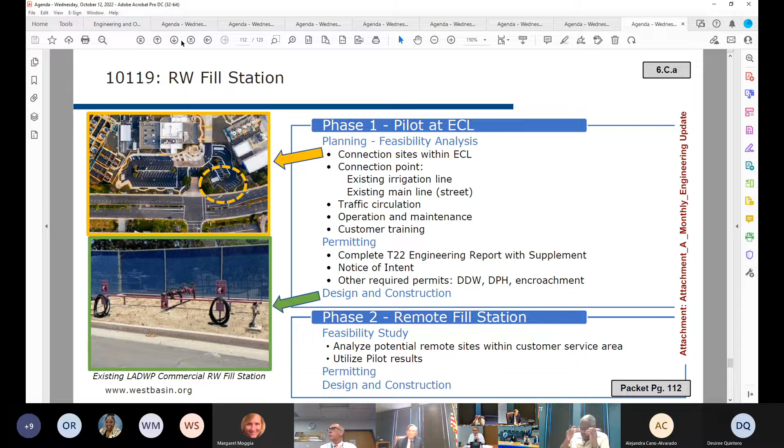If you follow me to the next page, 113, you'll see pictures taken from a preliminary walk around the ECL Visitor Center parking lot to see where we could potentially connect. The image on the far right shows a potential connection if we wanted to have a service lateral to the existing main line in the street.

As EG mentioned, this is the schedule, and the main driver of the schedule is the permitting, which could be expedited depending on whether we get coordination with the regulatory agencies to get that permit quickly. But overall, our goal is to move as quickly as possible along with every department in this staff. So that is my update for fill station.

Okay, well, you heard our previous discussion on this, so hopefully that line can shrink quite a bit. We'll do our best. I think you can do better.

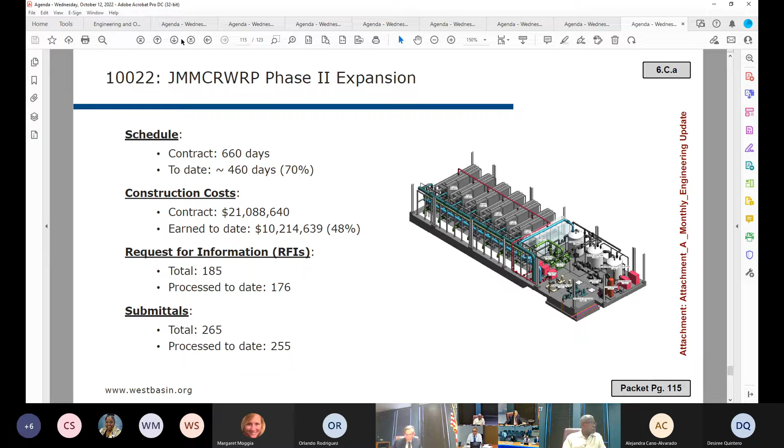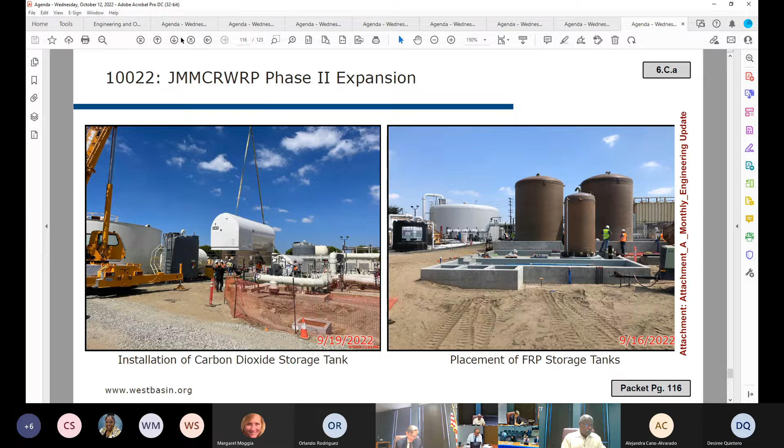Here's some photos showing some of the highlighted construction items in the past month. On the left-hand side, you'll see the installation of our new carbon dioxide storage tank, that was back on September 19th. On the right-hand side, September 16th, we placed our new FRP storage tanks in the new chemical storage area. Next slide, please.

On the left-hand side, we installed new access ramps or access stairs for the chemical storage area. On the right-hand side, you can see we started the demolition of our masonry wall. That's in the northeast corner of the plant, where our new potable water connection will penetrate the perimeter wall.

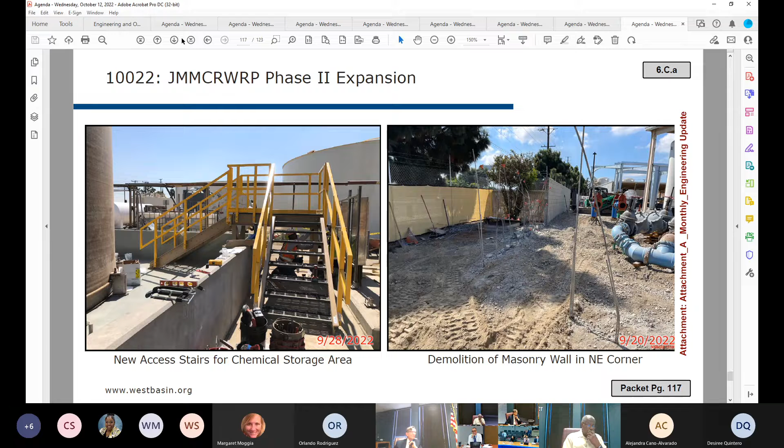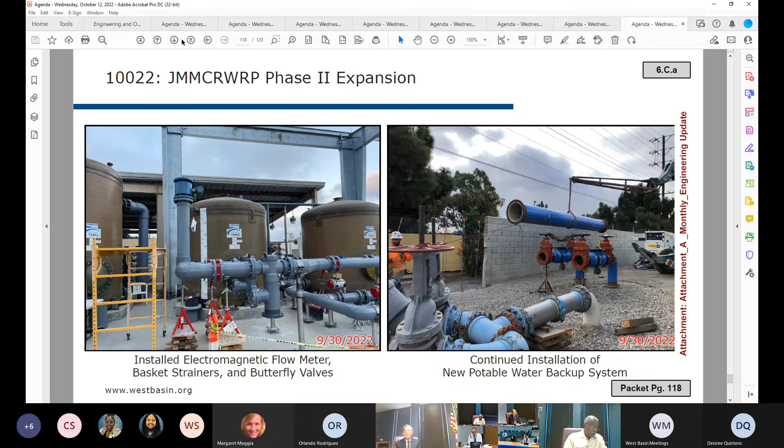On the left-hand side, you can see on site a lot of piping is starting to be installed, especially above grade, both in the chemical storage area and at the custom engineered microfiltration system. In that image, you can see a new flow meter, basket strainer, and butterfly valves which have been installed. On the right-hand side, you can see the potable water piping going in and our new point of connection.

Here is an update on where we stand with the PLA as it relates to this specific project. The Phase 2 expansion project is just one of 6 West Basin projects that fell within the PLA agreement that we hold with the Los Angeles and Orange Counties Building and Construction Trades Council and the signatory craft councils and union. So under that PLA, we define local residents in 2 categories.

Tier 1 is a West Basin local resident, so those are US zip codes that overlap with the West Basin service area. We also track Tier 2 local workers, which are US zip codes that fall within LA County. We also track at-risk worker participation, and for that you need to meet 2 of the following criteria: being homeless, custodial single parent, receiving public assistance, a history with the criminal justice system, unemployment, meaning having been unemployed, or having a gross household income below 50% of the median county income level.

The internal goals that West Basin set through the PLA for Tier 1, which is West Basin service area residents, we're striving for 30%. It's a pretty lofty goal, but we have an approved local percentage of 32.9%. We call it approved local because the contractor has requested as many workers as they can get from the halls that fall within our service area. Today it's exactly 17 or 18%, but because they've requested those from the union halls and none are available at the time, we count extra percentages. So the actual workforce percentage that is West Basin service area is more like 18%, but because the contractor is putting forth that good effort and requesting those workers, we have an approved local of about 33%.

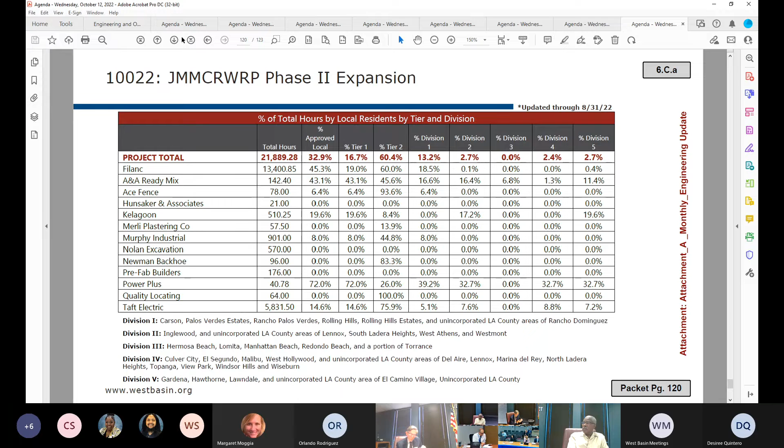Here is a summary of those work hours broken down by Tier 1, Tier 2, and Division. The bulk of the man hours currently are coming out of Division 1, with the rest of those hours being shared between Division 2, 4, and 5.

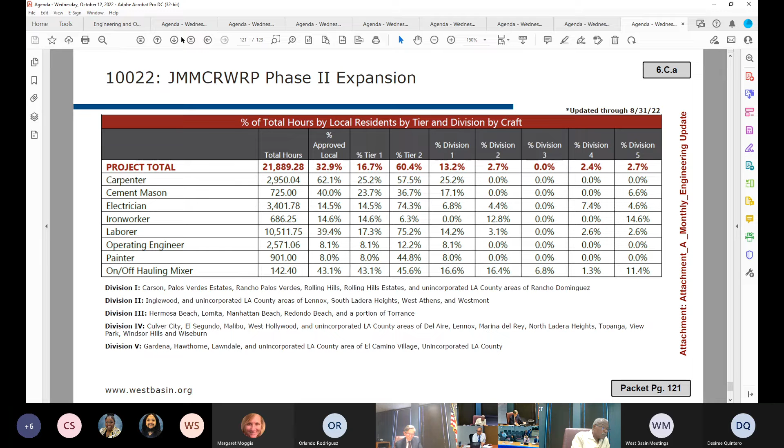This slide breaks down those man hours again, this time by craft. You can see the bulk of the work coming out of carpenters and laborers, actually cement masons also, and haulers. Some interesting data.

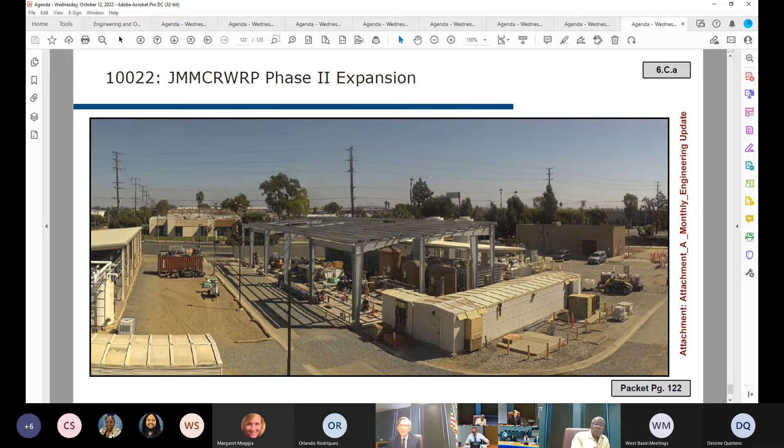No, just that the great reports, excellent presentations. And then I don't know if we have any board members left out there. If we do, do you have any comments? Hearing none, I don't have any additional comments, except to say thank you very much.